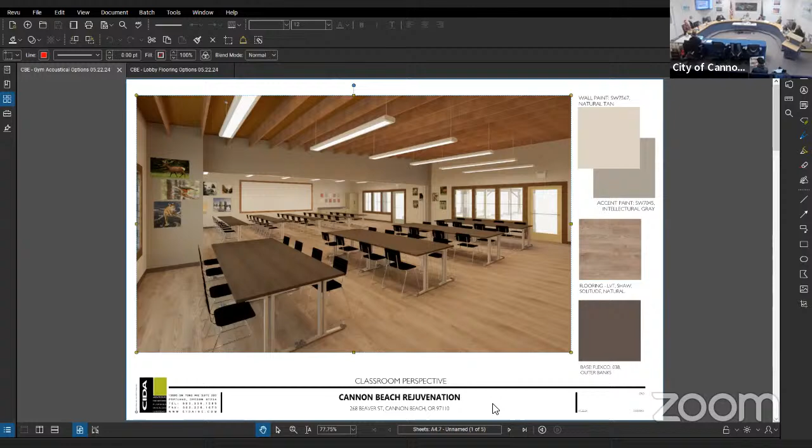These next renderings are for the gym. The main conversation we were having was more about what we were doing with the ceiling, since some of the options we showed last time were just really too heavy. So what we've shown here are a couple of different options: painting the existing structure a light white color, or potentially more of a mimic of a wood color, and then changing the color of those acoustical panels. If you recall, last time we had the wood structure painted a dark charcoal gray with a dark charcoal gray acoustical panel. This one is using a wood mimic color with a kind of brown panel, so this is your darkest option, and I'll come up and show you.

These other options show the wood structure with a light panel, and then the white with a light gray panel, or the white paint with a white panel. You can see very quickly how they change in feel as you walk into the space.

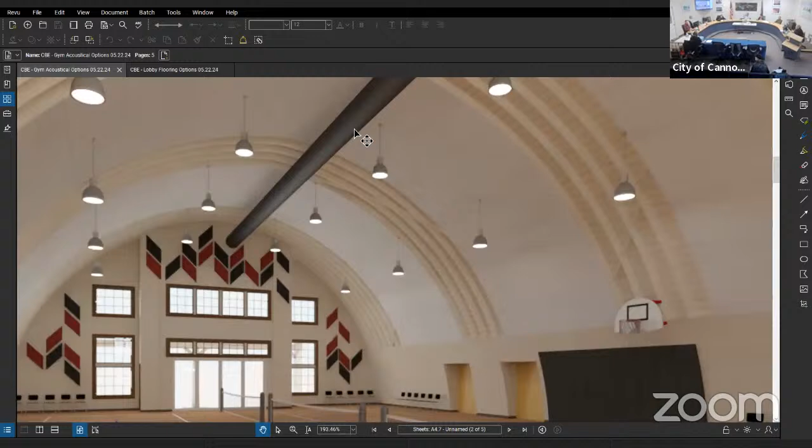Can I ask you a question? Why the dark black or dark brown hole down the middle, why is that color? That is, I believe, the HVAC duct, and it's just showing a little darker than it probably will be in reality. That's probably just going to be a spiral aluminum. Oh okay, we could even paint that as well, it doesn't have to stand out quite so heavy as it is. I actually hadn't noticed that before. We can always paint it, but the reality is it's just straight off the shelf, that kind of stainless steel chrome. It's a lot nicer than black. Yeah, you're right.

Sleeve, that's what I remember. It might be fabric, and we need to make sure it doesn't go bang when it fills up. What happens is it'll fold like this, and when the air comes on, it starts at the end by the air handler, blows up all the way, and then it goes bang. It startled me several times.

Are you looking for us to weigh in on the different options? Yeah, I'll come up in a minute. I'm just going to go through this quickly so you can see them. I think those were the four slides specific to that, and I'll probably go back and forth a bit. I'll leave it there and come up to show you the actual finishes.

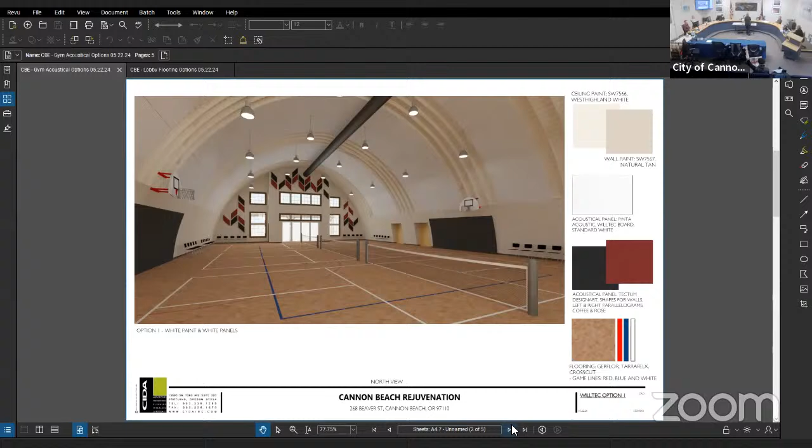Well, do you want to weigh in? Sure, yeah, absolutely. Because we live in Oregon, I would say go with the gray, and I don't want the dark - it's attractive, but just not for this climate. I like the warm white with the light colored wood ribs, because I love those ribs, I think they're beautiful. That's really nice, and they don't have a picture of that.

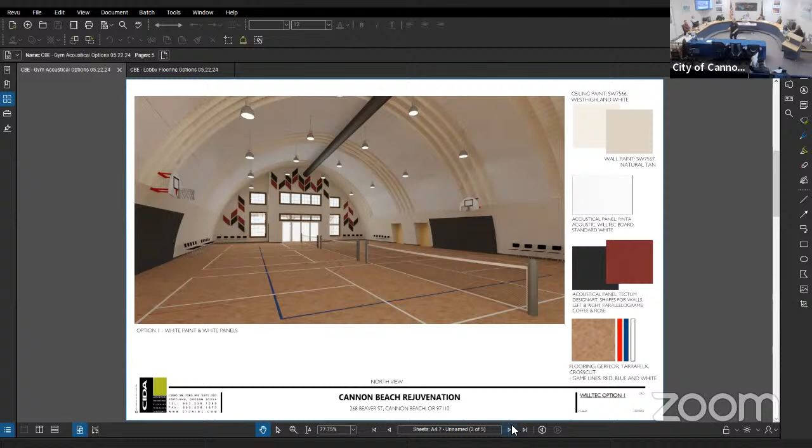Well, we have a vague idea - this one here is actually showing the gray, but it's so representational that it's just a tonal difference. Those ribs are a lot darker in that one. That's the problem with renderings - you've got to tweak the lighting to get it to work better, whatever colors come up on the digital screen, that would be the warm white colors, right? Yes.

White and the light wood, yes. And if other people felt strongly about the light colored wood versus white ribs, that would be fine too, but I think the ribs are so attractive. That's my choice. I wouldn't want them as dark as they're showing, I wouldn't mind it lighter. I prefer the light, the white on white, because of the climate and how dark things get. I think it won't be too dark.

I think she might have rendered it with this darker one. Yeah, quite a bit different. Like that. And I always say, once you turn it, it really changes things.

And think about this as your flooring, so you're gonna have this kind of opposite. Yeah, that would be nice, so it's a good way to tie it together, if that makes sense. Definitely want the lighter, if we're gonna have color up there, definitely want the lighter.

Another question I have is why are you putting blue lines on the floor, why aren't you picking up the red of the design? Those are specific to the different sports - there's a volleyball line, a basketball line, a pickleball line. I'll just get rid of the pickleball one. So they all create... no, you don't, until you get coffee with the councilors and you get it all sorted.

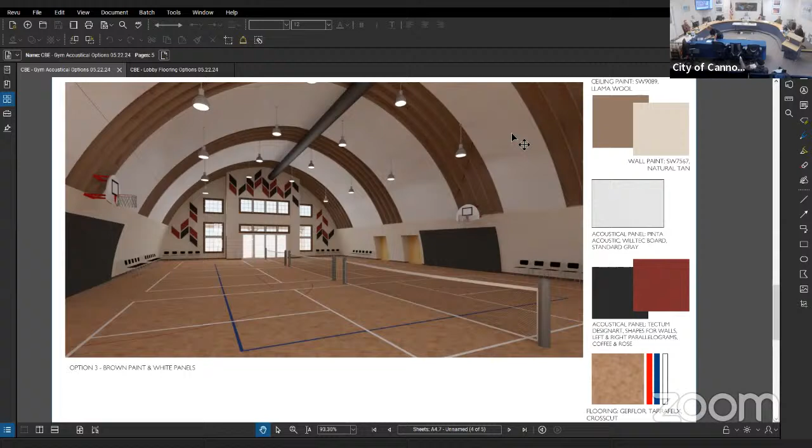So that's that one. The next one is gonna be an experiment, so again I'm gonna show these side by side. But keep in mind the renderings can only do so much, and I even had to look at these side by side to understand there's a difference. So the one on the left is the taupe, we're looking at the floor, that pigmented concrete. The one on the left is taupe, which is a little bit on the lighter side. The one on the right is the Kailua pigment color, which is theoretically the darker one.

So here's my question. When we met last time, I felt very strongly that when the community was here, we had two different colors of pigment, not just a difference in texture.

I asked that they go back and figure out what the cost differential is to have one other color of pigment, because that's what we showed the community, and they liked that. People had a lot of enthusiasm about the lobby, but that's been watered down since. I don't think Remick has done an update on the pricing to see about changing the color, because if you were going to do a stain color, it's different. But with the pigmented color, it's all poured the same, and with the coastline cut we're trying to do, it's going to be difficult to get two distinct colors. I think he's working on it, I can confirm with him.

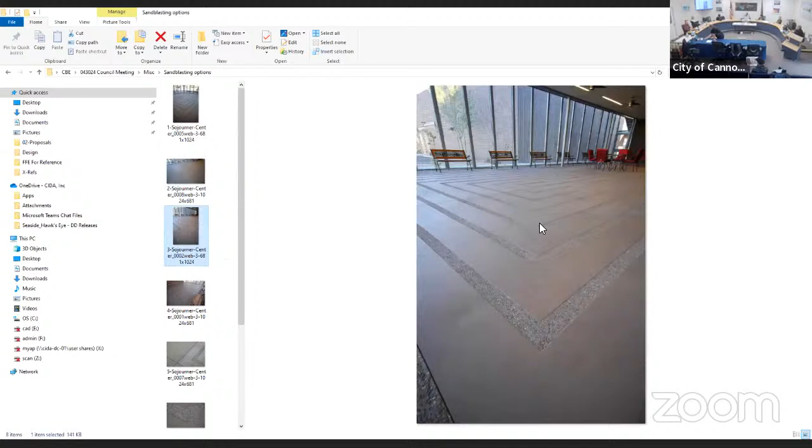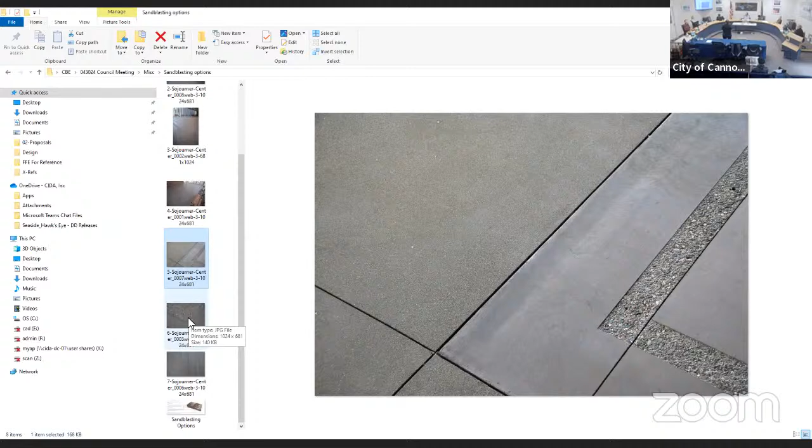Okay, so these are showing you it's all one pigmented concrete with sandblasting, right? What I'm going to show you here in a bit with the samples on the floor is you can really see the difference. It very much depends on where you're standing and the way the light is hitting it, but as you toggle through these you can see a difference in shade and tone between the sandblasted kind and the standard sealed finish. It's not a color change, but it's definitely a differential. It can read as a color change, very subtle, depending on how the light hits it.

So are you suggesting that's what's going to happen with the floor in the lobby, that type of finish versus the rough? So where would the rough be? That would be the outline of the land side, that's our assumption right now, and then the standard sealed would be the ocean side.

Is it pigmented? Yes, it is pigmented. Part of that pigmentation was to get more of a warm feel to the concrete. Early on we talked with the tribes about concrete being cold and industrial looking, and they didn't like that. So this concrete has the pigment in it, so it has that warmth to it.

Take these with a grain of salt, because they just cured and all they were able to do was get the sandblasting done. That's why I have this cup here, Bruce. Once it gets a sealant put on it, it will start to bring out the difference. You may not even be able to see it from here, but if you touch this, you could feel where the sandblast is versus where it's not.

I don't know, but as you move a little bit, you can probably pick it up more. There's a standard finish here, then a sandblasted area in the middle and sandblasted around that side. If you wet them both... yeah, it doesn't... I can't get it in there.

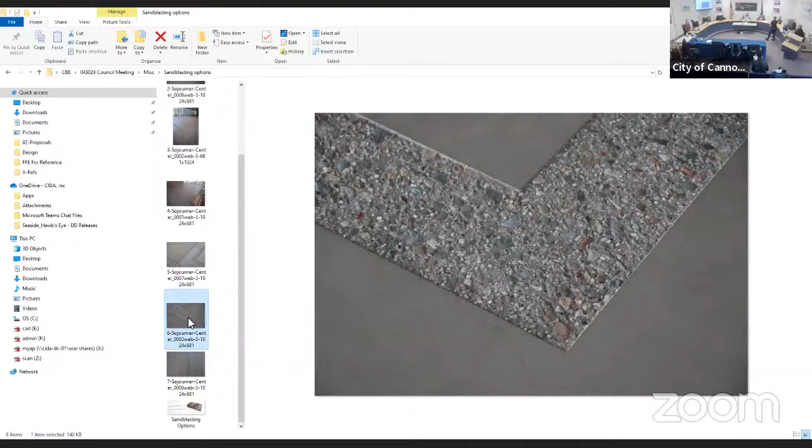From here, the sandblast on the one on my left looks much different, more definition there. It might just be that there happens to be more aggregate at that one area. I can see that, and I understand now what Brandon explained about why you couldn't do two different pigmented colors, because you'd have to build such an incredible structure to separate them.

I'm just wondering about the color then. So is that the color being proposed? It looks a little cementy. It is the one, you're right, that we were proposing. It's darker. Can you give us some other color options? They do have other color options.

If you're saying that tribes don't like the industrial kind of feel, I think those both look industrial. I think concrete in and of itself certainly can, though I've seen concrete look incredible. Yeah, incredible, and it's probably a stained concrete. Well, probably it was. We can look more into that.

If you seal a stained concrete well, can't you preserve it? You can, it's a maintenance issue. You're gonna have to reseal it, especially in those heavy traffic areas, more frequently. I don't know how often off the top of my head.

I don't honestly recall where Bremik thought this would be a better solution to get what we're after. So I can talk more with Dave about it. I wish you would, because I'm just not thrilled with that.

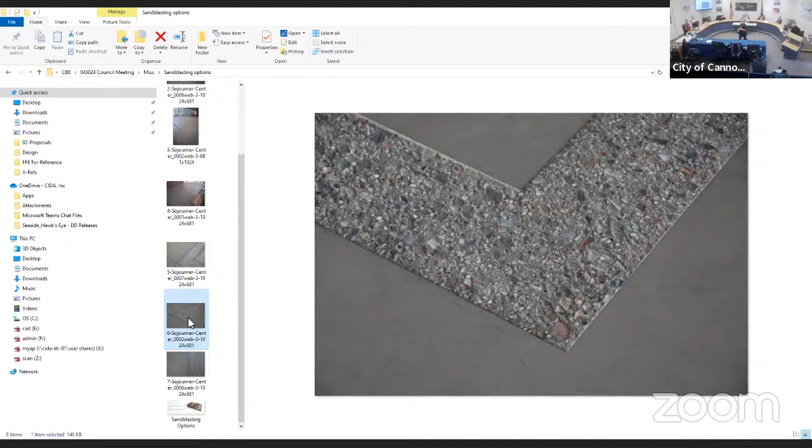I think it's okay, but I just don't think it's gorgeous. It doesn't show the reality of what the screens are showing, what your projection is showing. And that's what we wanted to look at, given that the floor was such a big part of the lobby and what turned people on about it, I think we have to make sure whatever we do on that floor is very cool.

Well, if that's what the design is supposed to look like with the part in the middle, as it's drying off you're not gonna see that. But it's not gonna dry off — that sealant is gonna make it look wet all the time, so you'll see that differentiation between the two. I'd love to know what the difference in maintenance is of a very well sealed stain versus a pigment.

When we talk about the stain, you say we were showing two different colors. I don't remember there being two different colors so much as a light and a dark. So I just want to clarify, when you're thinking color, explain that a little more. I just felt like maybe it could have been the same color, but one was much darker than the other, a much bigger contrast. This is too subtle, it's way too subtle.

And I just think that everything else in the lobby is sort of those brown tones and beige tones. I thought the floor seemed to me to be a sort of dramatic center for the room. Definitely.

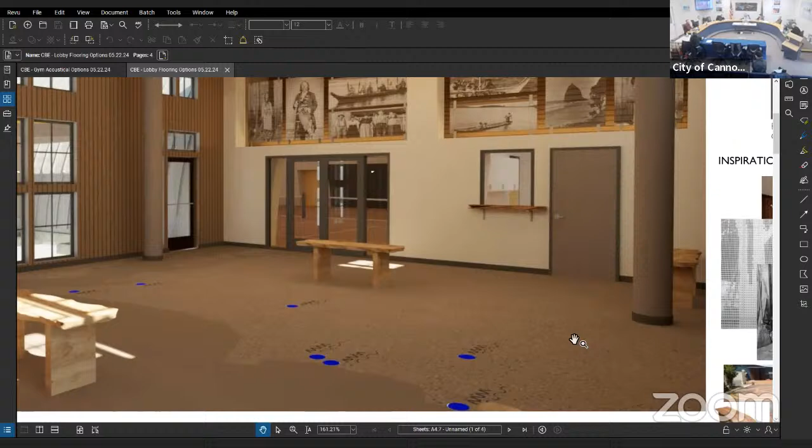Well, maybe you could get the original pictures you showed us 2 years ago, or whatever it was? I probably don't have them with me. Maybe, I might. I think I had them this time—back in the archives. It's like 15 years ago. Seems like it. Maybe another 15 years. Don't know. I do, wow, I do. What's the date on it? Shoot, it's only February of this year. Oh come on, no, this was way before then. The original, this is like 2 years ago. Yeah.

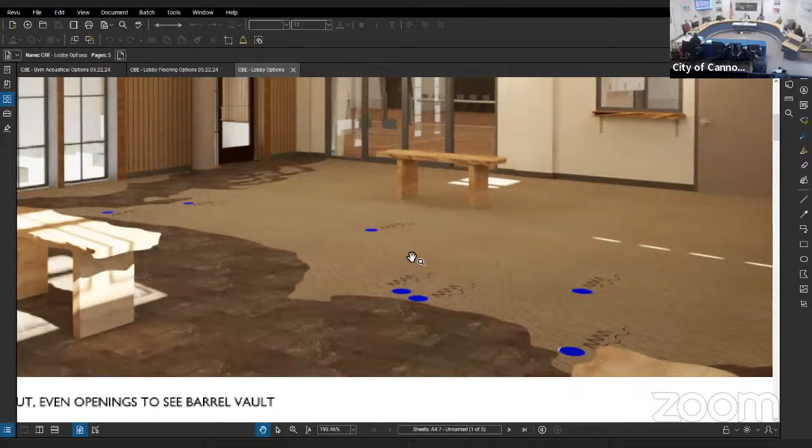These ones? That's close, that is close. Yeah, so this one—I believe this was carpet at one point that we were proposing, but, ick. Right, yeah, I was waiting for you. But I understand what you're saying as far as the contrast, and that this change has lost enough of that, so we need to come up with some different options.

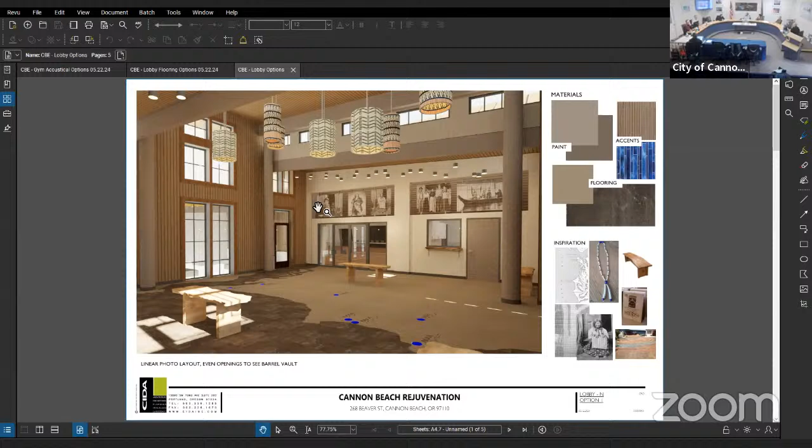Yeah, agree. Because I'm not interested in disappointing people. So if you look at that next to it—if you could get the color and contrast of the previous slides she showed. The one on the right? No, the one that showed the pictured examples of the etched concrete representative of this design. But if you could get those results, I think that's what we're trying to achieve here.

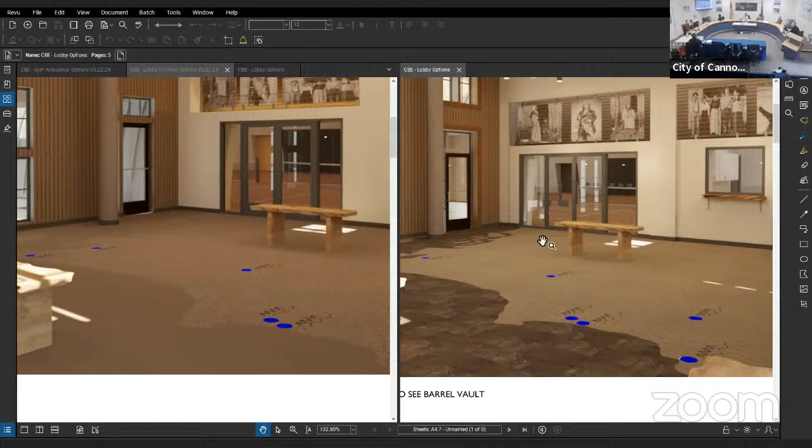See, I think that's just too subtle. I don't think this is an accurate representation of what the work would actually be. I'd have to see an accurate representation, because if I look at that and look at that picture on the left, I'm underwhelmed.

So I don't know how feasible it might be to do a mock-up, like a mini version, and actually etch a coastline and see—without going to all kinds of expense. I think what would best serve us is if we got what it's really going to look like. It doesn't necessarily have to be the shape, but it definitely has to be the texture and the tone and the contrast—well, that's what I'm explaining.

So he was able to get these literally just cured and sandblasted to me yesterday. So I can take these back and see—if they put that sealer on there, maybe that makes a big difference—and bring that back. But in the meantime, also talk to him about some other options to get higher contrast, so you can look at those side by side. And the cost of stain, and the wearability of stain—initial cost and long term.

Because stain can also get you wonderful, subtle results—it doesn't have to be all wild—but it can get a really nice texture in the water part that makes it look almost like water. No, I know, I've seen some really beautiful stained concrete. I've also seen a lot of beautiful concrete that has worn really terribly. So I just want to make sure if that's the road we go, we know what we're going into, we know what the maintenance is. Have to know that. Yep.

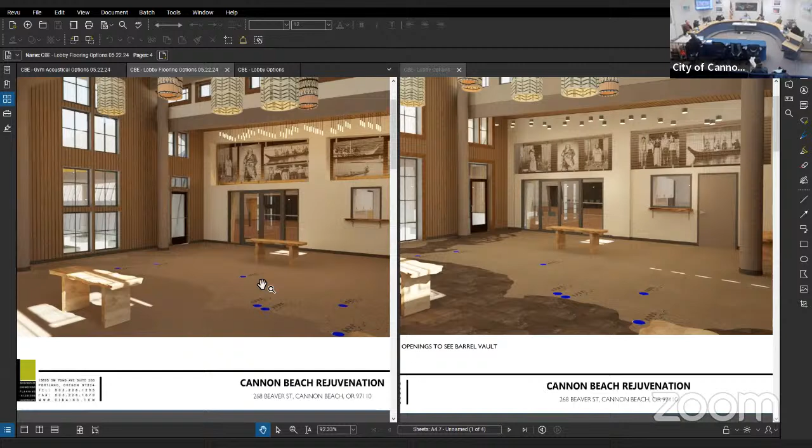Okay. But other than that.

So the other things up there that we talked about to some extent last time was the bathrooms and the tile on the wall. So the bathrooms themselves—the floor would be concrete, whatever we're doing in the lobby—but to have a wall tile in the bathroom up to 4 feet, like a wainscot. Yeah, so we've got a couple different options here.

I brought you just the samples, and some of these you've seen before. I think what we only had was very neutral colors the first time, so we pulled a couple others that have a little bit of color. We saw these before as well. But the other thing we talked about is that even if you do a neutral or white, what we could do above that on the walls is pull in some color—that would make a big difference and not make it feel quite so institutional.

Do you have a lighter blue than that? Well, there's all kinds of lighter blues. I mean, isn't that one in the middle? Or just different tones. Yeah, different tones.

But even at that, you could go with more of a neutral, subtle color. I just don't like the wall color with the blue, not particularly. It looks gray to me. Yeah, me too. We tried to keep it more of that subdued color rather than a real bright blue. Well, there's a much wider range between subdued and bright.

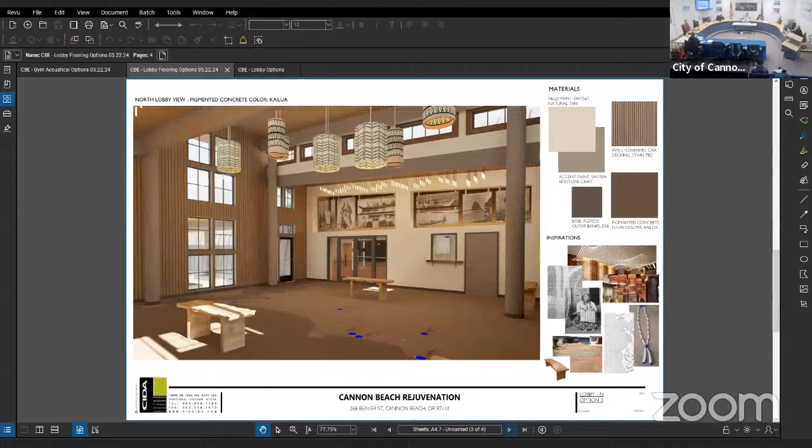Okay, I think that's everything, we've gone through the couple of different views of the lobby. Well, I'm happy actually, because I'm thrilled to see the actual color is lighter than in this rendering for the gym - I even thought the lightest one looked dark in this picture, but now I see the color, it's much better. See, Lisa? For some reason the pictures on my phone are so dark, it didn't come through.

I think everyone's is gonna have a different look to it because of your printer. And these lights are not the best. No, fluorescent lighting always makes a big difference, it gets greenish, which can be difficult - great for skin tone.

So my marching orders are to have further conversations with Bremik about getting these samples to be true representations, with whatever sealant would go on it, so we can actually see what the finished product looks like. But also to talk about the potential of a stained concrete, so we can get real high contrast, light versus dark, like cobalt tile. But that's tied in with our tribal meetings. And then like a light powder blue option for your toilet room. I want to know the cost of the various stains, cost, maintenance, all that stuff.

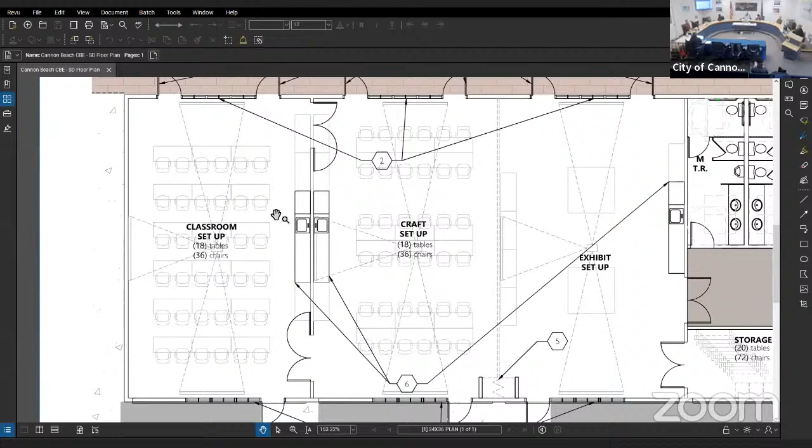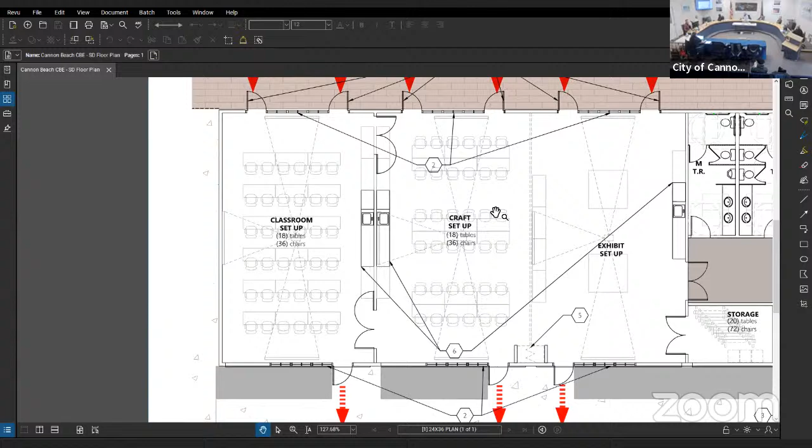Yeah, but if you're showing a movie in the double classroom, it was more like 100. Yeah, and I don't have that one with me, it might have been in a previous packet. We did show - and again this is so old it doesn't have that operable partition between these two rooms, it's showing it between these two - but we did do a max capacity layout here. And I want to say with your aisles and exits clear, it was 130 some max, theater seating.

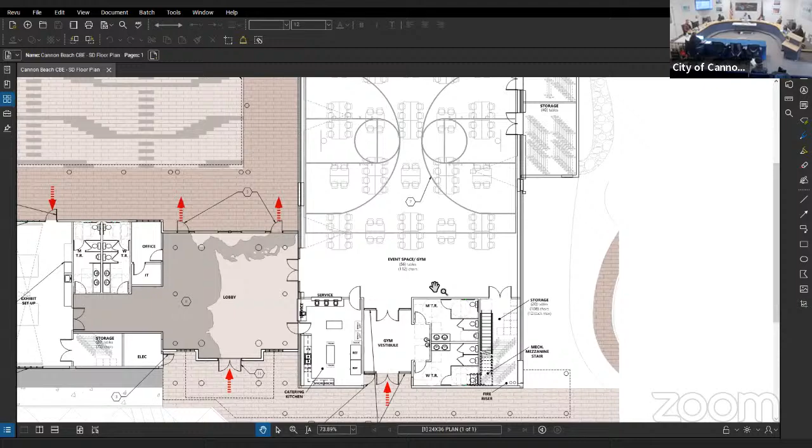And then what we had shown in the gym for an event with some tables and chairs, keeping space for a stage presentation area, leaving space here around the kitchen and the entry and bathrooms, we had this at 112 chairs. So I think this schematic that we had last February was a max of like 270 something. So you could have a full event in the gym and have a show movie in the two classrooms at the same time and be under 300.

I think simultaneous, you'd be right there. Probably, yeah, and then you include staff and other people, right. And then you think about parking, parking, everything else associated with it.

What I'd like to do is get to the idea that to be successful, we don't have to maximize every event. We just have to have a lot of events and a lot of things people are interested in, without overcrowding. To get back to the point that was made, we wouldn't plan on having those max capacity events in both locations. It would be a very rare.

I'm much more comfortable with those numbers if they were each separate, not full max. I would just like to make sure we're not tying the hands of people that'll come later. If somebody says, well, let's see how many people we can get in the gym or something, it's somehow in there that, no, we never have more than this number. We never have more than this number in the classroom. I think that changes the nature of what we're trying to do.